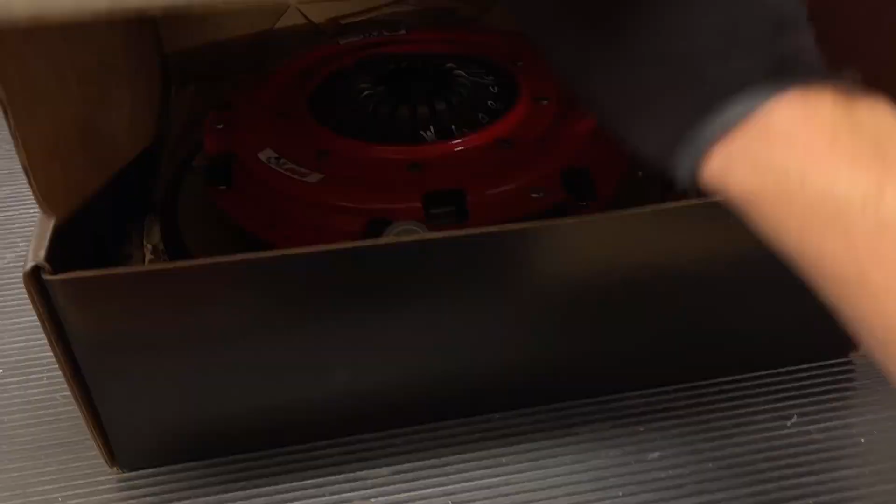Hey guys, Danny Johnson here, and today we're installing this McLeod RXT twin disc clutch into our 2004 SVT Cobra. Now this is a 26 spline clutch, and so we already installed the 26 spline input shaft, so check the video description for that video. And on this one we're going to have to also be changing our pivot ball stud length to make sure that it fits properly, since this clutch does come out a little bit deeper than a stock clutch, being a twin disc clutch.

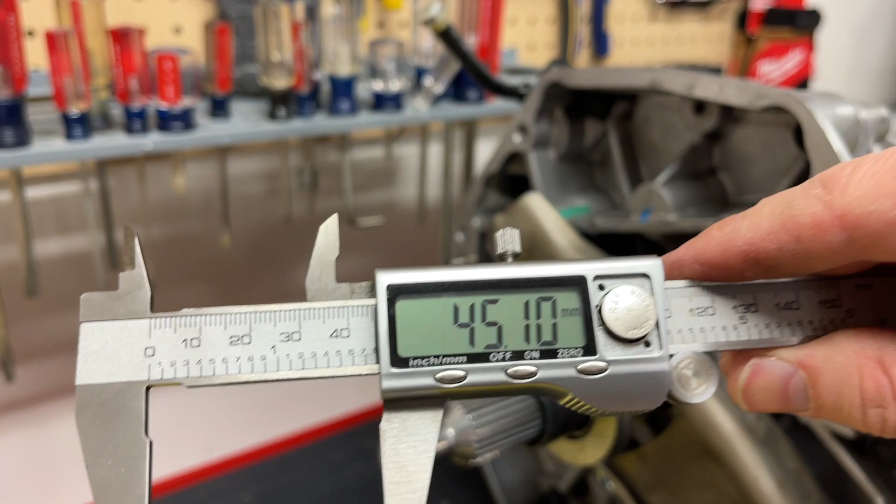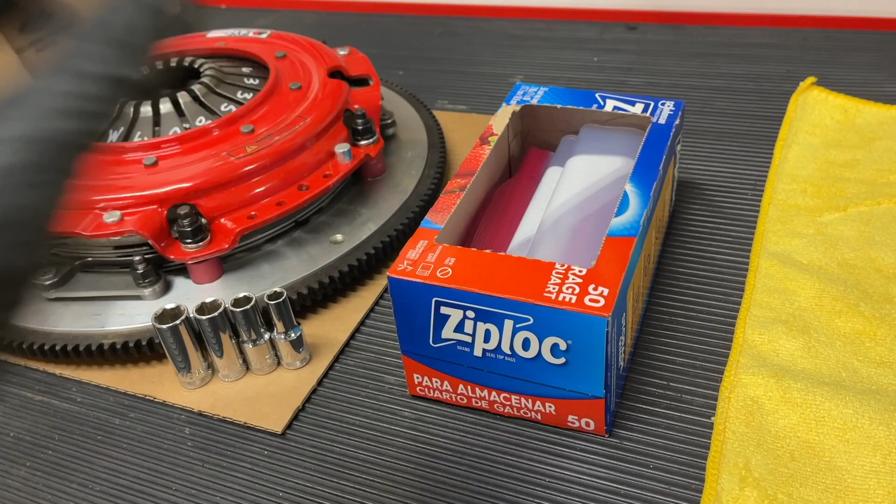I decided to get a bunch of Ziploc bags and label everything. It's probably not too important on the pressure plate nuts because it's just the nut, the lock washer, and the regular washer, but it is important with shims on the other pieces. So my recommendation is to put all of the hardware in individual labeled bags. So I'm going to take this mark here and say bolt 1, 2, 3, 4, 5, and 6. And so basically that's how I'm going to count this. You could do it however you want.

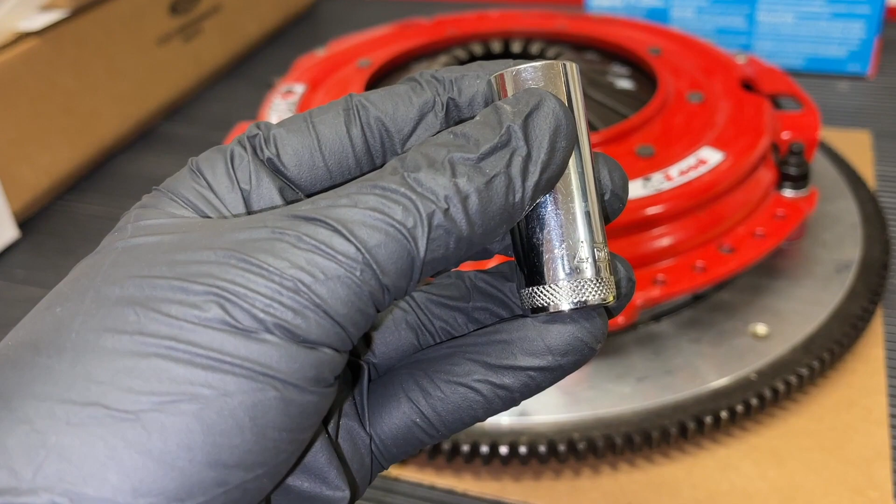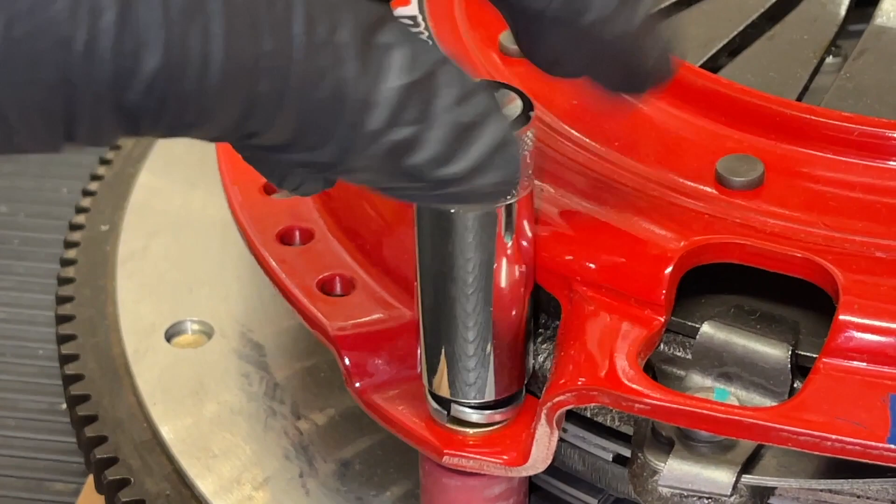So I'm going to rotate the flywheel, and I'm going to use the alignment mark as basically the center line. I'm going to go clockwise and go ahead and take out these. Now I'm also going to take them off in opposite directions, the crisscross star pattern. I'll be using a 14 millimeter socket for this. It really shouldn't matter the order you take them off, but torquing them down, you want to go in the star pattern across from itself. So we're going to go ahead and just use that same method here. This one was even on light enough that it basically came off hand tight, because again, it's not assembled to go on the car yet.

So we're going to go ahead and remove this nut here, and right under it you'll notice there is a lock washer. So the lock washer has a little split in it. Okay, so that's the one that goes on next. And then under that we have this gold color washer as well. So that's going to be the orientation for all these. Again, I kind of went crisscross and removed them in a star pattern, even though that really shouldn't matter for removing it, but that's just what I wanted to do.

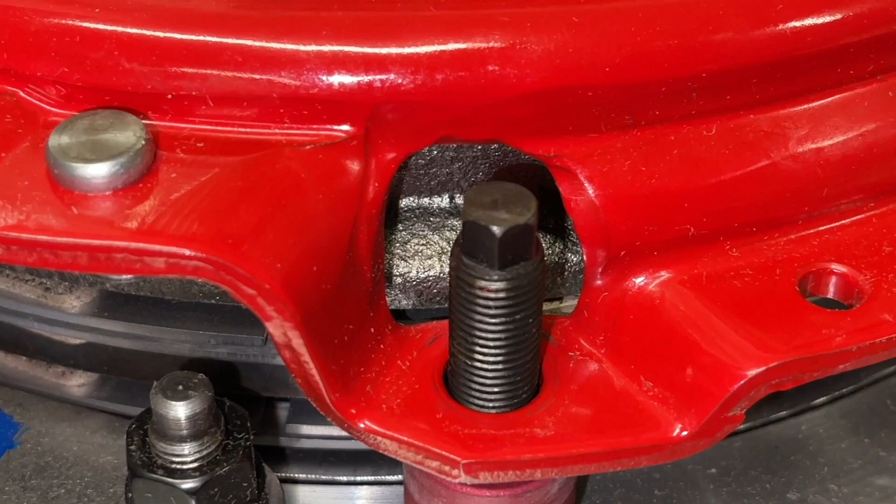Okay, so again, here's what you have for the pressure plate, at least the top part of the pressure plate, and these are studs that are coming out from the flywheel, and they have the little hex on the top, so you can take those out if you wanted to. But with all of these 6 removed, we're going to go ahead and lift the pressure plate off of the rest of the arrangement here. We're going to flip this upside down and gently put it down over here. You don't want to touch any of that surface area. You want to keep it clean of grease and everything.

Okay, so now you'll notice the first disc that we come up to says top, and so this is the top disc, and it also happens to be the top side. And so just so you know that that's right too, again, don't touch any of the surface area or get it dirty. You'll see flywheel side is what it says on the back here. So this is the top disc, that's the flywheel side, and so this is the pressure plate side. So again, this is how it would go on. So we're just basically going to unstack this and show you.

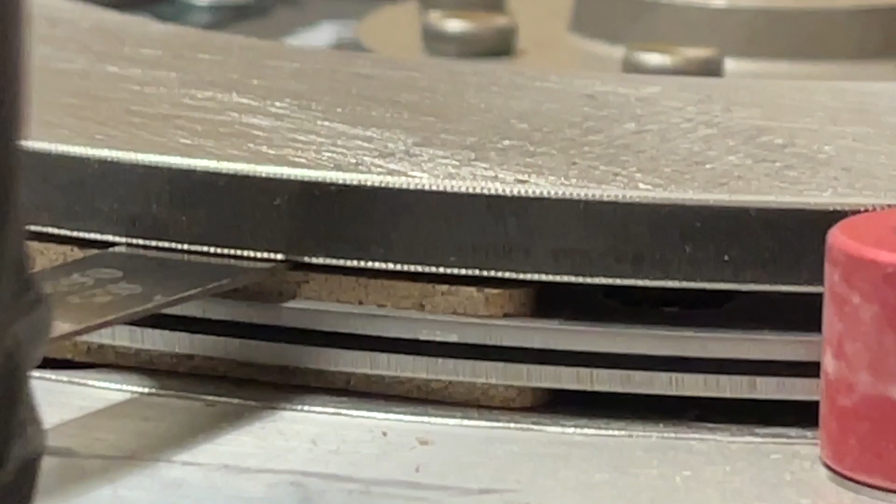Next we have our floater plate that acts like another pressure plate, and it has its nuts with lock washers on that. Now with them tightened down, they were down pretty tight. We're checking this when it's on the car, but I'm going to show you what we're doing: we're taking basically our 20 thousandths here and making sure that it can fit in between that disc.

If you have more than 25 thousandths, then you're going to have to rearrange it somehow, okay, with different shims and washers. And notice we have our paint mark here, and notice how that strap is on the bottom of our floating disc here. You don't want to put it on upside down when you reassemble it. Okay, again, we're putting all this in bags.

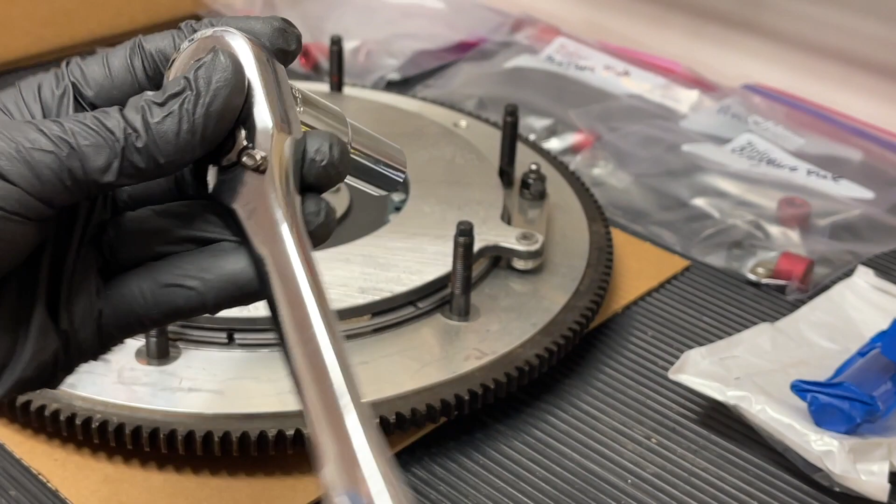These will now float right off, and so we're going to go ahead and take these. And even though these ones really shouldn't matter, we're just keeping them exactly how they came to us. So 1, 2, 3, 4, 5, and 6. And this one required the 1/2 inch socket, and I also used a larger 1/2 inch drive because they had this one torqued down pretty tight. Okay, so we're going to go ahead and break these ones loose, and we're going to keep all of this hardware in its own bags too.

So we have the pressure plate bolts, which were 1 through 6, and now we have what we're going to call our floater ring ones, and there's 3 of those. So I named this one floater number 1, and so as you'll see here, this is going to be the nut on the top and a crush washer right below it. We're going to take those off, floater 1, 2, and 3.

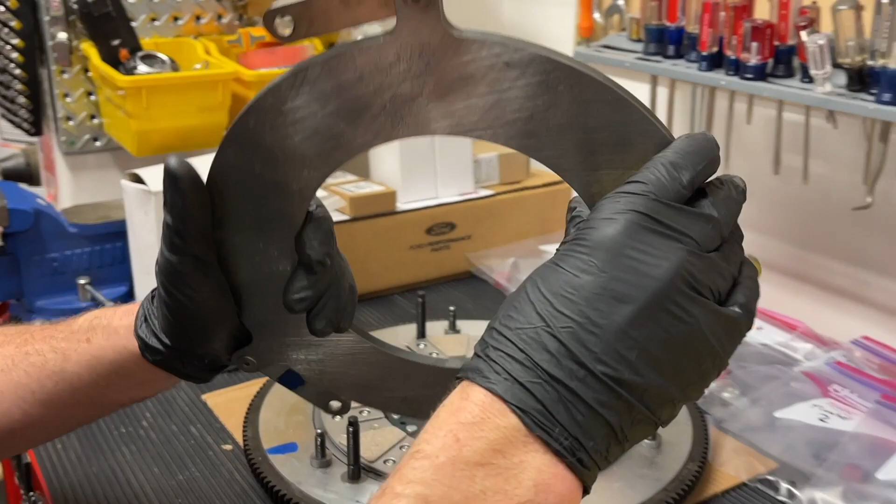And now as we lift this off on our floater ring, okay, notice this is how you could get this upside down. You want these tabs right here to be the one that touched the flywheel. So you can see if I inverted it, you could put it on backwards, and you should not, but I'm just saying it's possible to put it on backwards. So you want to keep that orientation correct. So that's what they mean by those straps being the flywheel side.

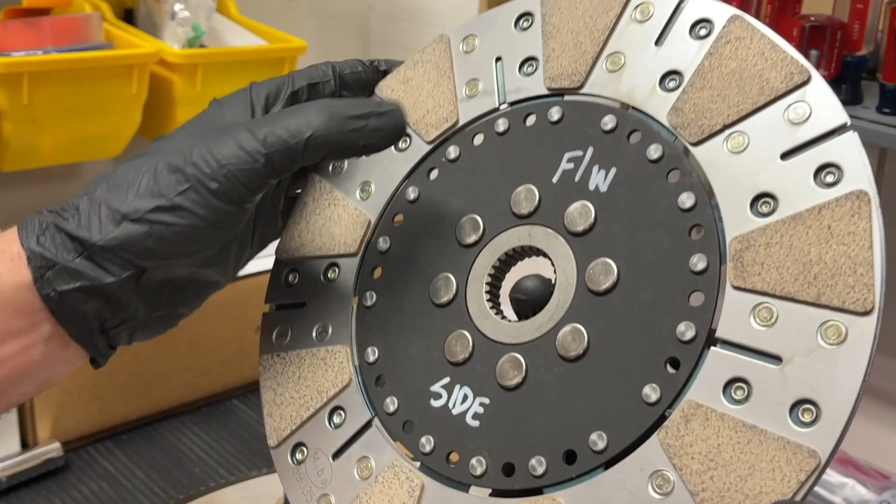Okay, next we're going to come in and take off our second disc. Okay, so this one is going to say it's the bottom. Okay, so this is the bottom disc. However, don't think that's the bottom of the disc. This is the flywheel side here. Okay, so it's the second disc or the bottom disc, but you want the flywheel side facing the flywheel.

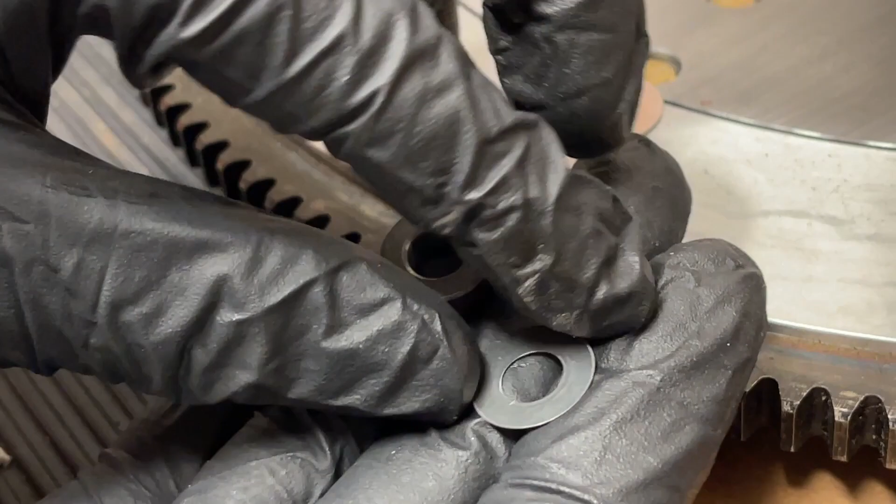Now notice that where the floater straps were, where we take that off, there are now shims, as well as another one of the stands, as it's called, or the bigger spacer. Okay, and there were actually 2 of these little tiny shims, as you see. They came apart here. So you had 2 shims and a spacer. And they might have it set up differently however they needed to from the factory. But just wanted to show you what that looks like.

And we're keeping that in our floater bag again, just keeping everything separate. So this is going to be floater number 1 is how we clocked this one. And so we're going to go ahead and put this in the bag. Okay, floater number 2 is the same thing. We had the spacer with the 2 shims on top. And I've seen other people who had these, they gave them extra shims. I didn't see any extra shims with mine, but this is how it came out.

You'll also notice that under the pressure plate studs, there are also tiny shims here on the bottom. There were 2 of them, so you've got to really watch out for this hardware and make sure it does not fall off as you're disassembling this and then putting it back together when it gets to the car.

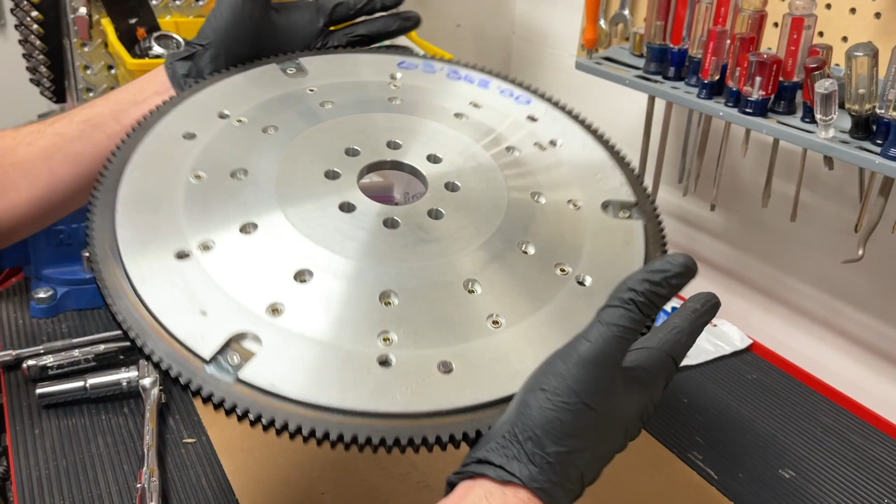So now you'll notice I have 8 holes for the 8-bolt crankshaft on the Cobra. So that's really important. If you have a Mustang GT 2-valve, unless it had the Windsor engine from 99 and 2000 and half-year model in 01, you might have an 8-bolt crank for that one, but most of the GTs with the Romeo engines, the 2-valves, had 6-bolt cranks.

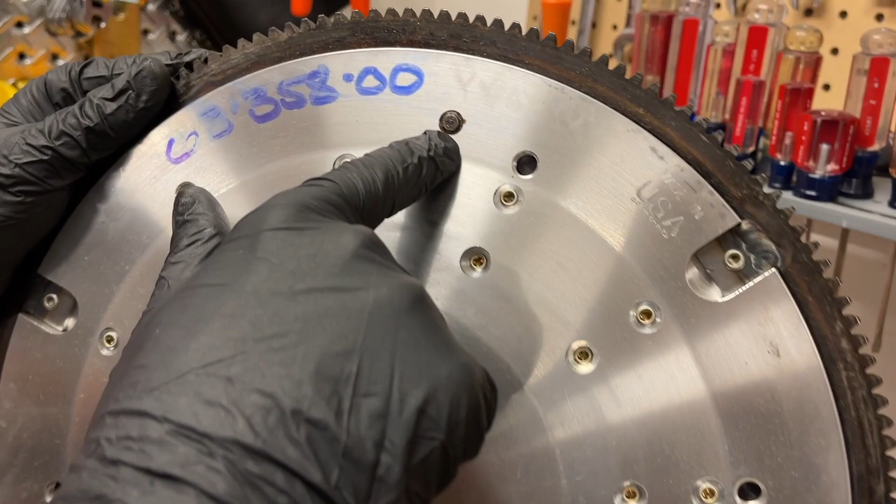Okay, now this flywheel was made in the USA, and it looks very similar to the stock Cobra one. You can see here where these studs are coming through the back. And something I wanted to point out, because we're going to compare this side by side with a Terminator flywheel, are these studs and how they compare. And so the main thing I want to point out is that the Terminator flywheel, for example, has marks where it has been balanced. They are slightly different. Laying these down next to each other, they're different too.

And if you are keeping your stock flywheel, I believe that the McLeod kit would then give you an adapter plate that goes onto your flywheel. You're no longer using your flywheel surface because it sits different. So just keep that in mind and look into the kits. I bought mine that came with everything that was new so that I didn't have to worry about any kind of fitment or problems.

Also, something along the lines with the balancing, I believe that they want you to balance it if you're putting their new kit and retrofitting it onto your flywheel with the adapter plate. When McLeod sends you the entire kit, it might be a little bit better balanced. I didn't seem to have any problems with vibrations or anything with the car so far.

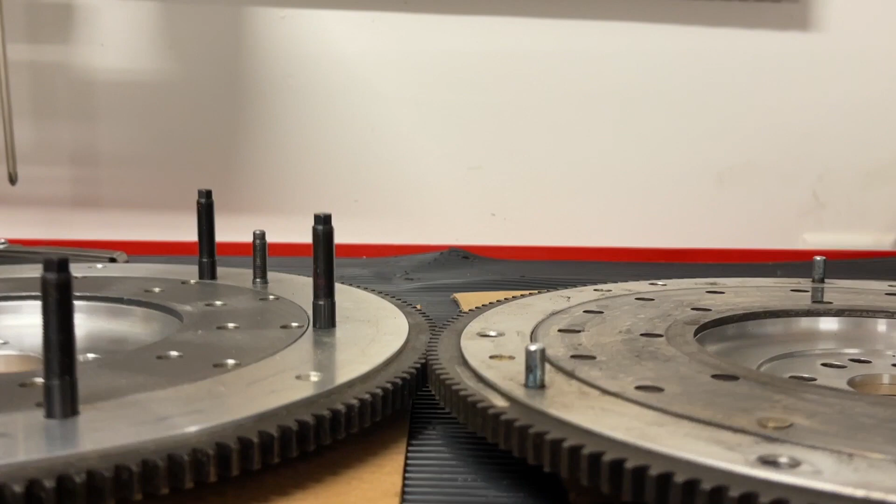Now, there's also a lot of questions about the pivot ball stud length and why it's so different for everybody. As you can see, just with these 2 flywheels themselves, they sit differently. So that could be some of the factors that are involved. So as you'll see in the video, we really need to measure what we're installing and have measurements ahead of time before we install.

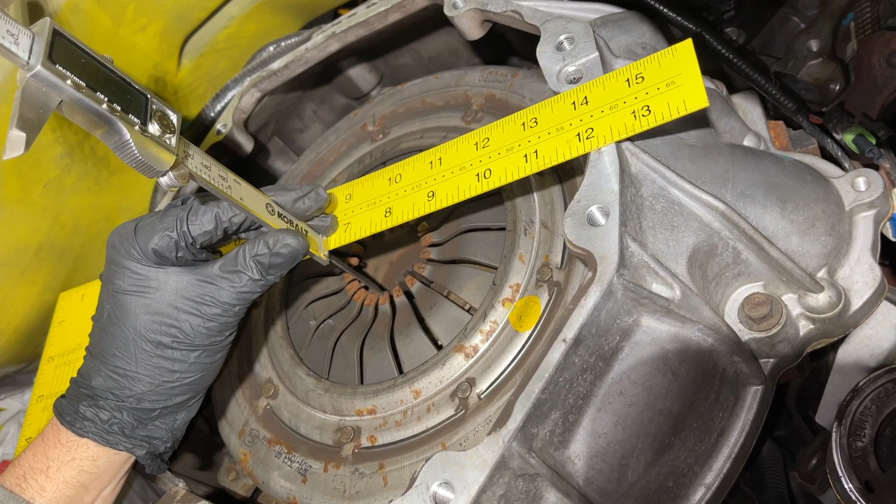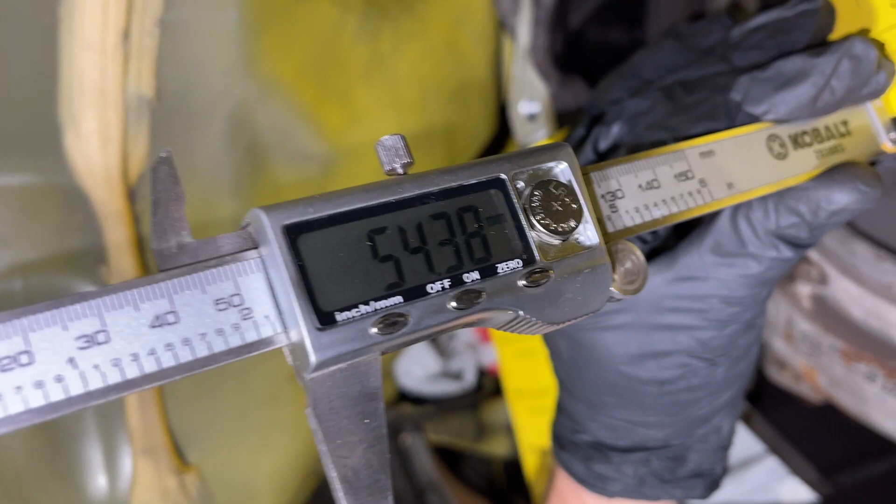Now, before we remove the bell housing and the stock clutch, we want to get some stock measurements here. So what we're doing is measuring across from the bell housing down to the diaphragm fingers. If we take a measurement this way, it's 54.38 millimeters, and that is from the back side of the ruler. There is another way to do it where you're stretching the caliper out. It's a little harder to get it on there straight because the feet have to be in there a little way. So you notice the measurement's off slightly.

So however you want to do it, if you want to take the measurement and then subtract the width of the ruler you're using, or do it this way where you're bringing it out, we just want to get some basic measurements. And what we came up with was that basically when the RXT is installed, it's about 6 or 7 millimeters deeper. So it's going to come towards the back of the car more. And that's going to make us do some different things with the pivot ball length for the stud.

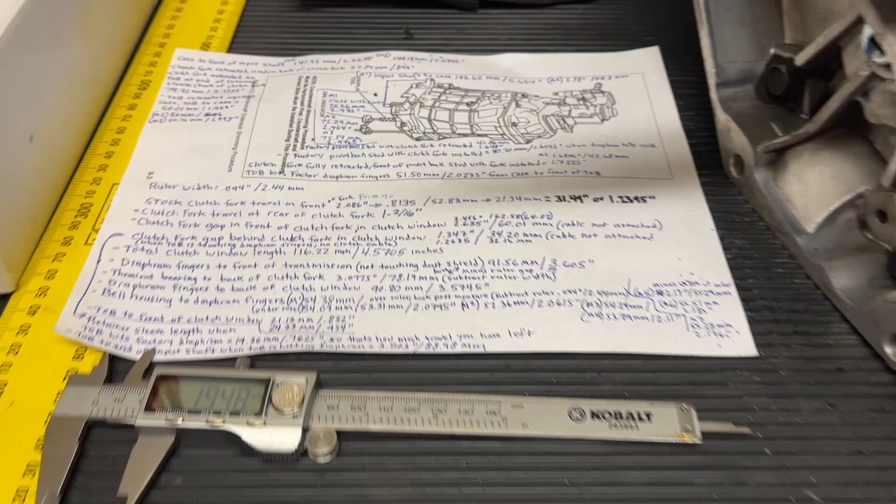But anyway, we went through and got some measurements here, and check the video description. I'm going to put a very in-depth video on all the measurements that I took during this process, which was a huge amount of them. But anyway, we want to have these measurements at hand.

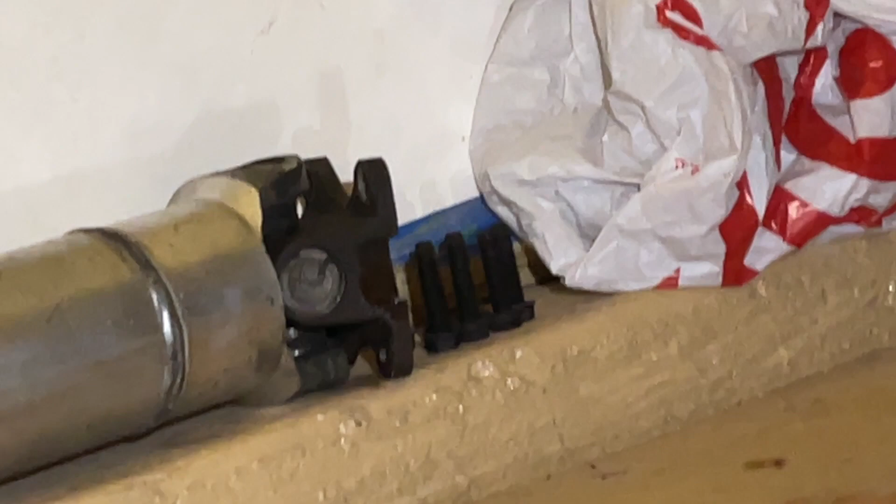T56 bell housing bolts, they're all the same size except for the first two down from the top. So these two are the very top ones. The next two down on each side are the longer ones. And the case bolts on the T56 are also all the same size, if you're taking it off, not at the bell housing.

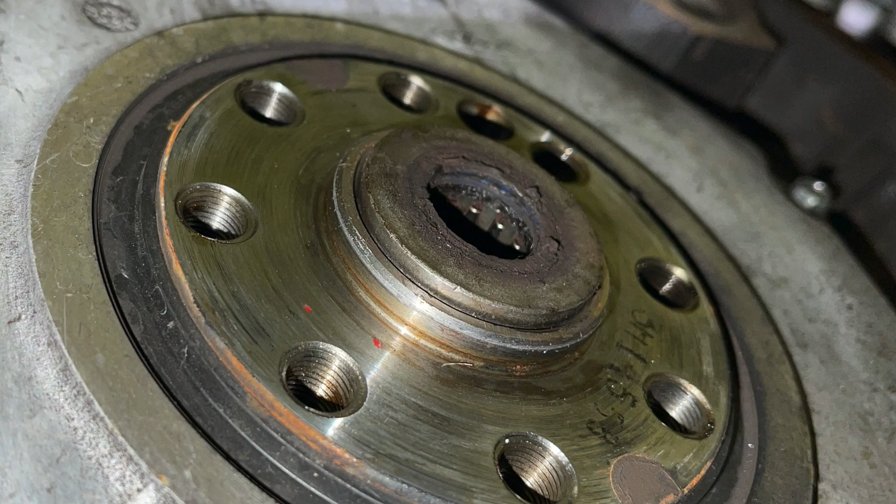Okay, so we removed the bell housing bolts, the pressure plate, and the flywheel off the car. This is what the stock pilot bearing looks like. Everybody has a question if they've driven theirs in far enough, and you can see it sticks out a little bit when it's fully installed. So now we're using our puller, and I have a full video showing how to use this puller and where you can purchase it if you want.

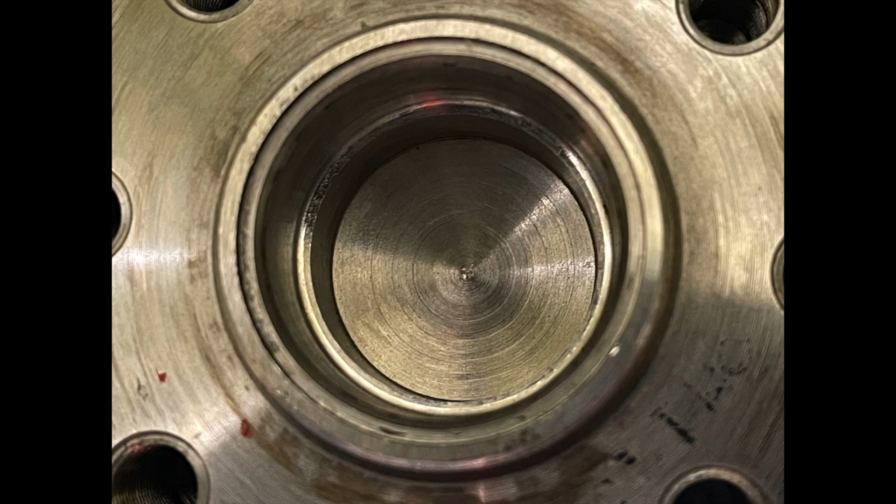We're going to pop the pilot bearing out of the crankshaft, and then we're just going to clean this up the best that we can. Our rear main seal looks really good, so we don't have to worry about that. Just get down in here with some brake parts cleaner. We put our pilot bearing in the freezer and then just tapped it in. Check the video description if you want the details of how to do a clutch, but this is more focusing on the RXT, and you can see my other videos if you want.

So we're going to start with our RXT here. The first thing we want to do is clean any of the oil off of it. It will have oil from being stored and shipped. So we're taking some brake parts cleaner, and we're just going on the mating surface where the clutch is actually going to contact.

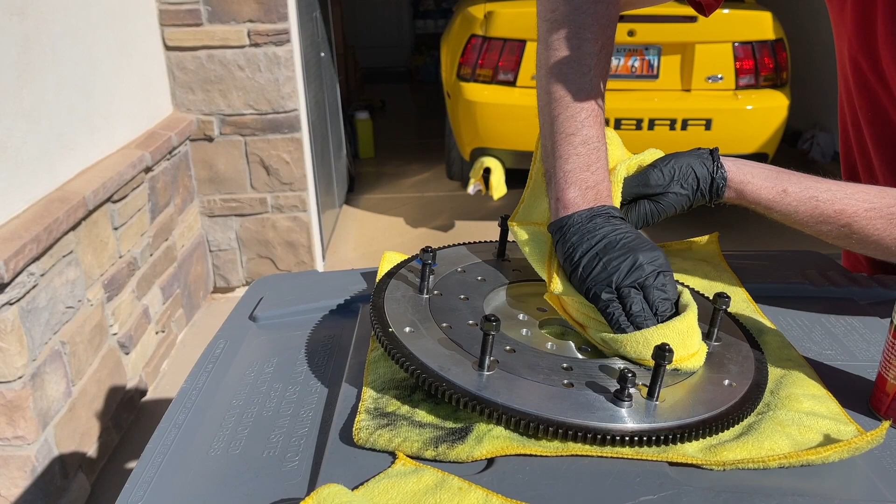Okay, as you'll see here, it's pretty black on the rag where this was, because they coat it with oil so you don't get rust as it's being stored. I've even heard to use the green brake parts cleaner. Okay, we got our new flywheel bolts and some thread locker.

So we're going to go ahead and put the new flywheel up on here. Aluminum's really nice. I've dropped a steel one on my face before. But anyway, when you line this one up, you want to clock it till all the holes are lining up. It might look deceiving, but you actually have to rotate it several times until all of them line up, because they're not equally spaced. So once you get it to where everything's clocked the right way, run the flywheel bolts in, at least to stabilize it.

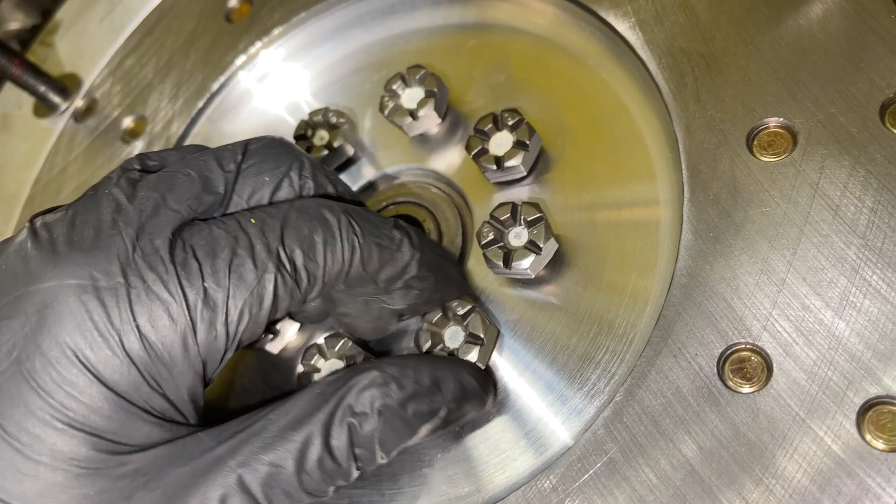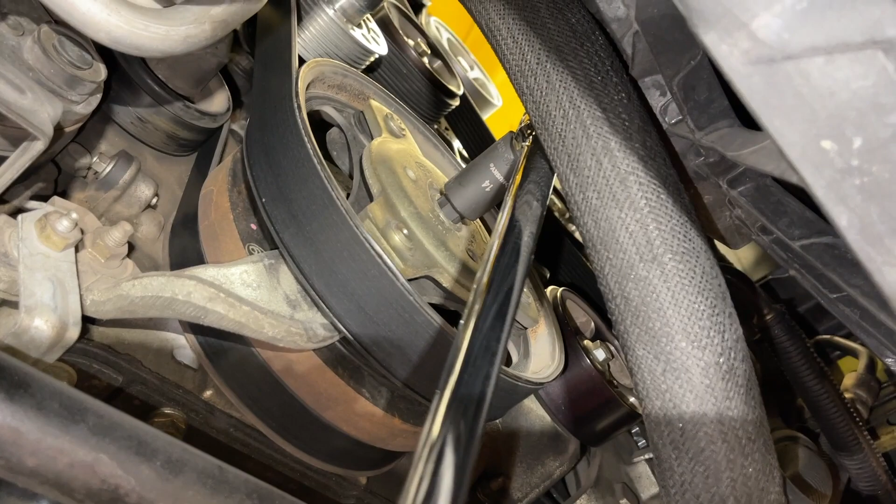And they're still loose right now, and so what I'm doing is cleaning off any oil that's on our new hardware as well, and putting a thin stripe of the blue Loctite. So now I'm putting them back in, and we're going to torque these down to 65 foot-pounds. So we're going to hold the crankshaft still. On the Terminator, it's a 14 millimeter Allen that you actually have to put in the front of the crank, and so that's how we can hold the crankshaft still.

If you have a regular GT or another Mustang, there'll be a bolt on the crankshaft there. So as you see, I'm holding the crankshaft while torquing this down. So we're doing our star pattern, every bolt across from itself, and 65 foot-pounds is the rating. So you can also put a dab of grease on the back side of the bolt head so that it doesn't scar up the aluminum as it bolts down.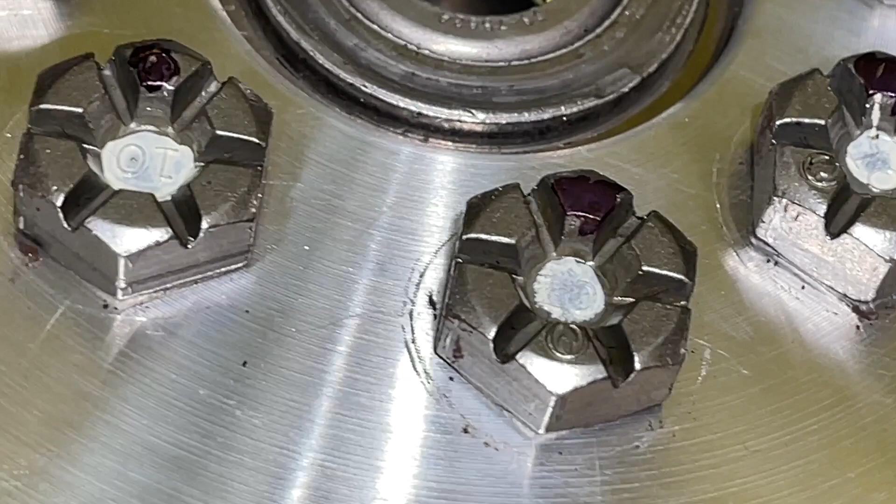And I went through and I marked every one of these to make sure that it had been torqued. And again, we're going across from each bolt as you're torquing it down, the star pattern. So everything's looking good here. Now we're going to come back in and again just make sure that this mating surface is clean.

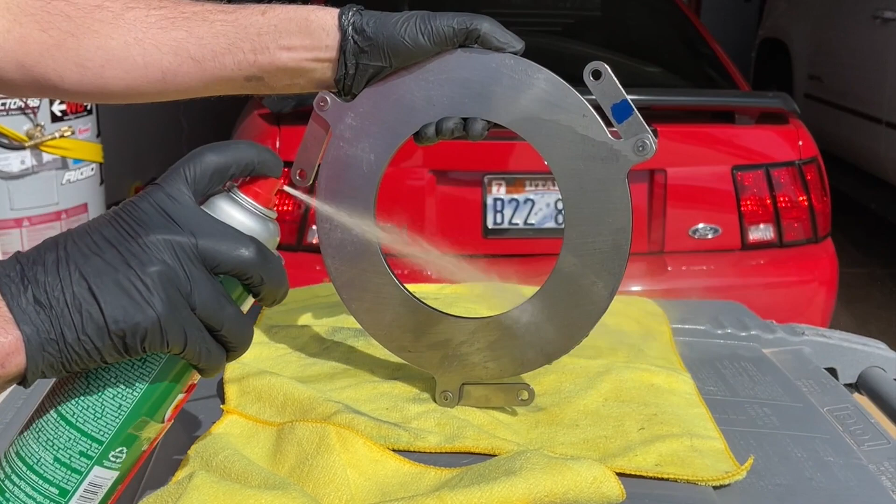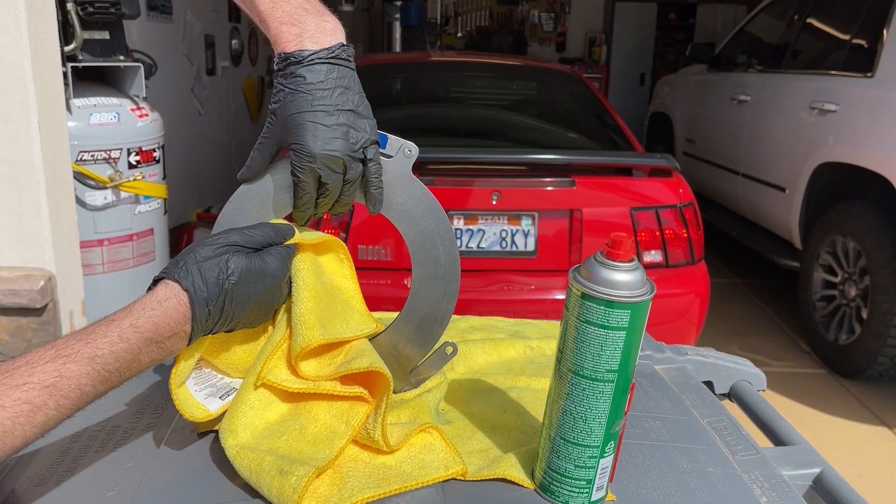Coming back outside, we're going to clean now the floater ring plate, okay? And so be careful, you have that indication mark, the paint mark for alignment. You don't want that to come off, so that you know how to align everything. But we're going to go ahead and just wipe this one down as well and get it nice and clean.

We had Justin SVT run and get a better torque wrench as well for smaller increments. Mine was for higher ones, so he ran home for a minute, which gave me a time to just enjoy the beautiful morning.

So as a recap for our floater ring, remember that you have the stand, which comes first, which is the thick piece. Okay, that's called the stand, and then these are the shims, and there's 2 of them on each of the floater rings. So the stand is going to go on first, followed by the 2 shims. Then we're going to put our floater ring on. So earlier in the video, we had all of our hardware separated, and so now we're putting it back on.

And so the first thing we're going to do is take the hardware off for our floater ring. And so we have the nut, then we have the crush washer, and then we have the shims. Make sure that they're on, and there's a stand, as it's called, that's under those. So refer to the front of the video if you haven't seen that.

So the first clutch disc is going to say flywheel side, and then it's going to say bottom. Okay, so flywheel side hits the flywheel, and bottom means it's the bottom disc. So don't think that that's the bottom part of this one. We're going to run our alignment tool in here just to hold it in place slightly.

And so now we're going to go ahead and bring up our floater ring plate. So make sure that none of those shims have fallen off the stands. And so another set of hands really helps here. Justin SVT, as always, is here helping me out, which I really appreciate.

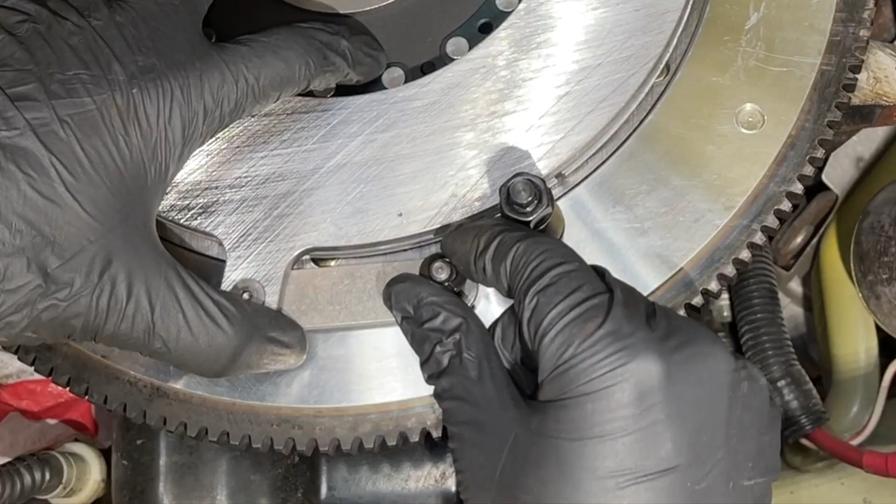So do not put this piece on upside down. It's possible to do so. So if the alignment mark's there, you shouldn't mess that one up, but make sure that it's going on as shown here, where you have the floater plate, and then where the floater plate strap is, it's down onto the flywheel side. Okay, so again, we had the stand, we had the shims, and now we're putting on the floater plate itself, followed by the crush washer, and now the nut.

Okay, so we have all 3 of these on, and they're nice and snug. And so what we're going to do is torque this down to 25 foot-pounds. Okay, so it's not a lot, 25 foot-pounds. We did 1, 2, and 3, and we want to check now to make sure that this first disc can move. And so it's moving freely now. In fact, it's moving a little too freely.

So basically, we're bringing in our feeler gauge. We're supposed to have 20 thousandths, maybe 25 thousandths at the most. But as you can see, we were getting 30 thousandths. So that's way too loose, and it can actually cause the top disc to perform differently. So we had to take it off and start over again.

So we removed the floater plate. It's not fun to do this, but you want to do it right. So we're going to go ahead and take this back off and take it over to the workbench. And so the way that we're going to adjust this is changing the shims that are underneath the floater plate. So here there's 2 of them on each of these. So we're going to go ahead and take these with us and go measure them over at the table. You don't want any of these to fall and get lost either.

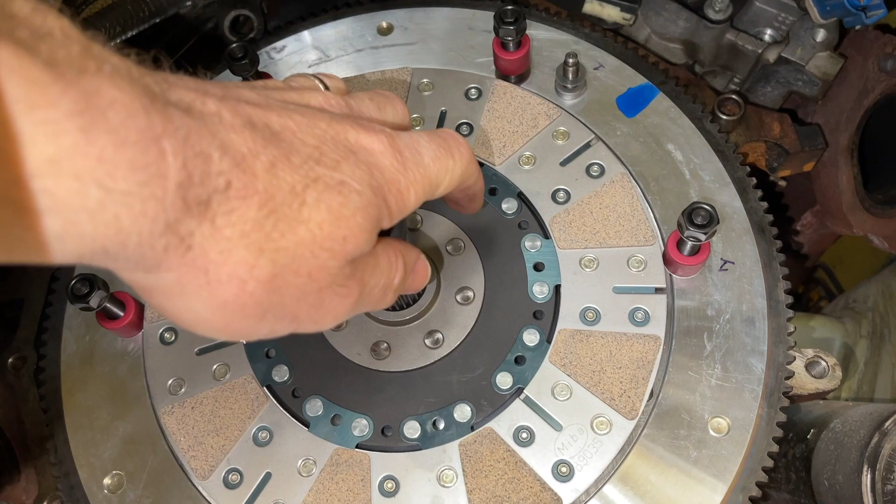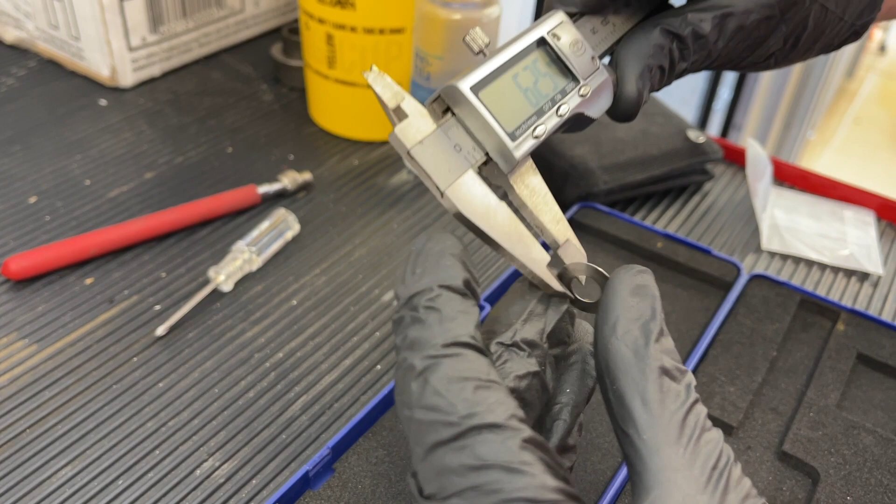So as we took this over to the workbench, what we were getting was basically 0.25 millimeter on these. Now sometimes I was getting a little bit higher of a reading, and it might just be because it's just such a fractional size on these. But in the end, we put back in one that was 0.25 millimeters on each of the stands, and then we took our next measurement. So we separated these out. I drew numbers on them so I know where they came from, if that was important. But basically we put a 0.25 millimeter shim back on each stand.

Okay, so again, for the floater plate, 25 foot-pounds is what they want to see on this one. So each stand now had one of the 0.25 millimeter shims on it, and we took our measurement and we got our 20 thousandths clearance. So that's with each of these 3 floater ring plates torqued down to 25 foot-pounds. Okay, we checked and the disc still spun freely like it should.

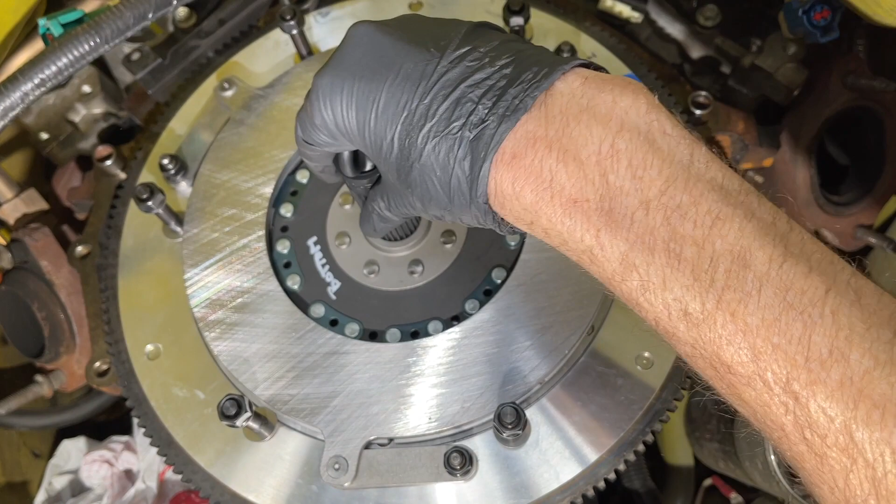And so now we're assembling for the pressure plate. So you have the shim on the bottom, then the stand that came down. Okay, so again, that's a shim down there. Make sure that it's in that order. Shim, then the stand. And we're just putting these all back in. We had them individually marked in bags, as you saw earlier in the video.

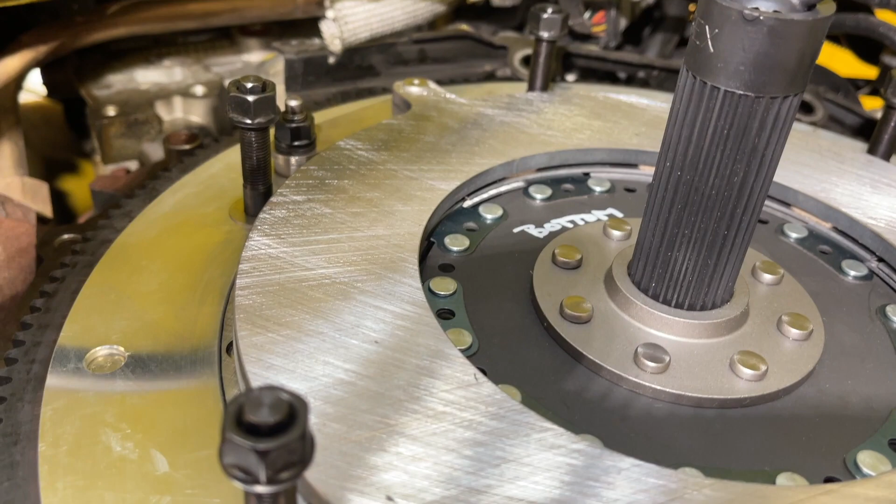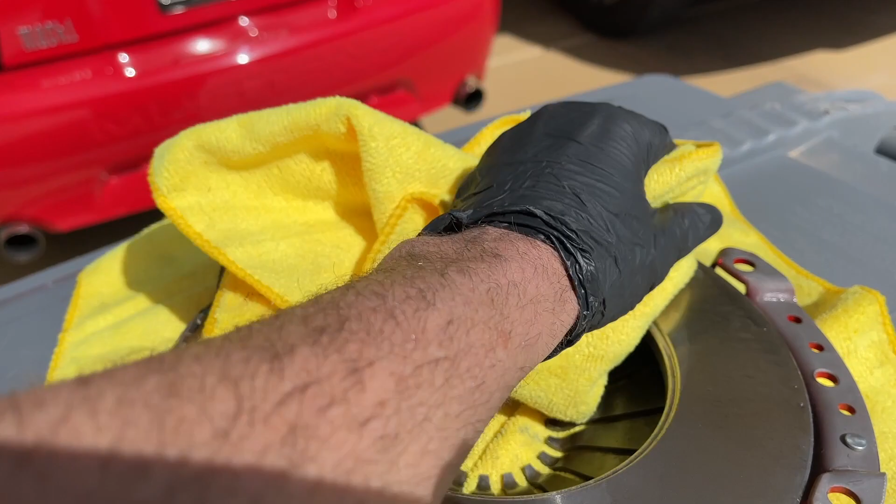Now we're going to clean the pressure plate itself. So same thing, coming through with some brake cleaner and really cleaning this up. With a microfiber, it kind of grabs on this material, so maybe a different rag would have been better. But we did get the grease off it, so it looked pretty good. So just make sure that the mating surface is perfectly clean from any oils or even your fingerprints, grease, anything like that. We want it nice and clean.

Okay, so next comes in flywheel side, and this is the top disc. Okay, now what's really important with these is with these 2 discs, they need to line up together or your input shaft is not going to go through. So here's our 26 spline input shaft tool, and this is good to use at this stage where you're sliding a pressure plate over it and everything. But in the end, you'll see us use the input shaft itself as it becomes a much better tool being metal. So anyway, we slid this up here.

This one again is also clocked, and it has the alignment mark. So you see at the top right where the blue is, it's also lining up with the other blue marks to make sure that we have this clocked properly. So there's our alignment marks. Make sure that that's right.

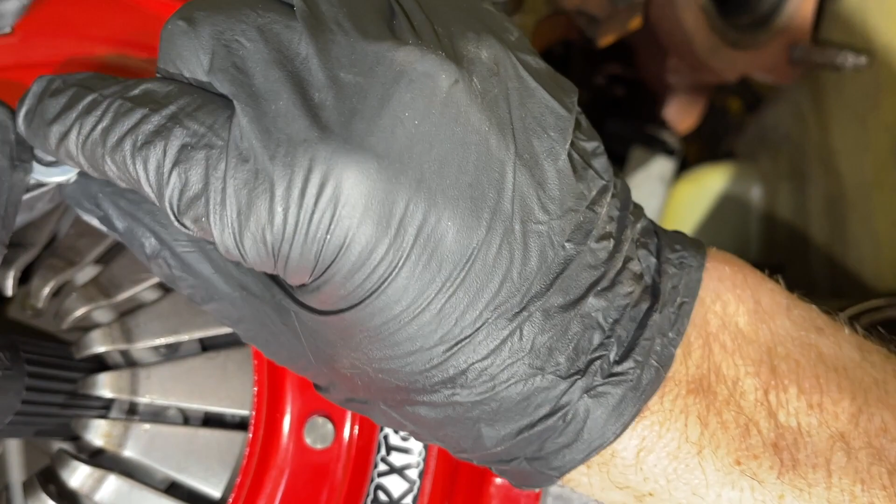And you have a little bit of wobble here, so you want to hold this as straight as you can, and you want to spin it. And by spinning it, you're clocking both of them together so that it will line up a lot better when the input shaft goes in. Okay, so now we have our washer, followed by our crush washer, followed by our nut.

Now we had these individually marked in bags, and again, this hardware might not be specific, but we just kept everything separated. So here's the input shaft itself, since we're installing that in the transmission next, and that made the best alignment tool because it's metal. You can clock it and turn it and really get it in there.

And now as we're tightening these ones down in our star pattern, that's where you want to make sure everything is straight. Okay, so this one is now 35 foot-pounds, and we are not using Loctite on any of these pressure plate or floater ring hardware. Okay, McLeod says do not use Loctite. So we used Loctite on the flywheel bolts, but that was the last time.

So you want to make sure that this is even and that it sat there right. Justin SVT was holding that input shaft up in there as straight as he could as well, which helped. And I'll tell you, we put the transmission in later and it went right in.

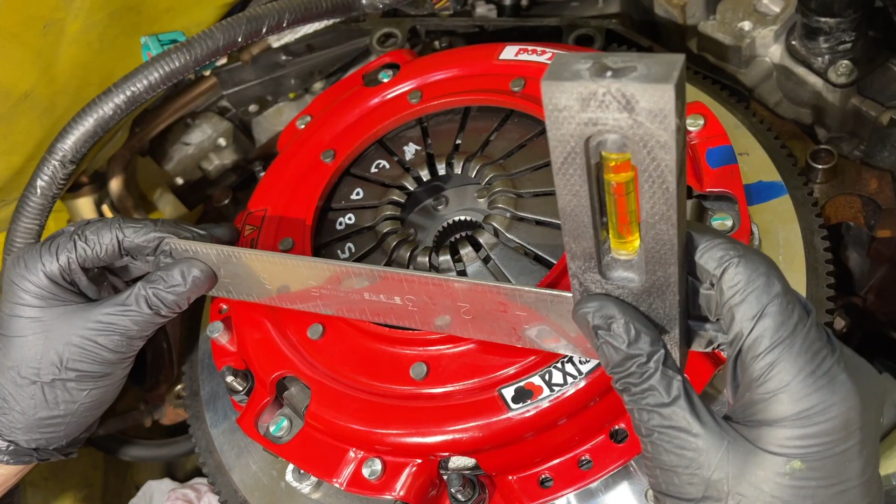Next, we're taking a flat, just a little straight edge here and making sure that these have gone down on the diaphragm fingers enough. They should have collapsed down, and as you look in here, you can see how well both of those clutch discs are clocked together. They're perfectly lined up, and that made a huge difference when we went to put the transmission in.

It went right in. So with the new clutch installed, now we're going to want to take our same measurements from the diaphragm fingers to the bell housing. And remember, if you're measuring on one side of the ruler, we need to subtract this amount or try to get a better measurement. So this one works pretty good, 48.25 millimeters if we're going from the diaphragm fingers up until we get to the back of the ruler. It's a little bit more wobbly that way, kind of harder to get a reading.

So 53.35 or so was the factory one. So what we're going to do is look at those two numbers, and in this case, this is going to be a difference of about 5.1 millimeters. The new clutch comes out farther than the old one. So we're going to work with some adjustability on this using the pivot ball stud.

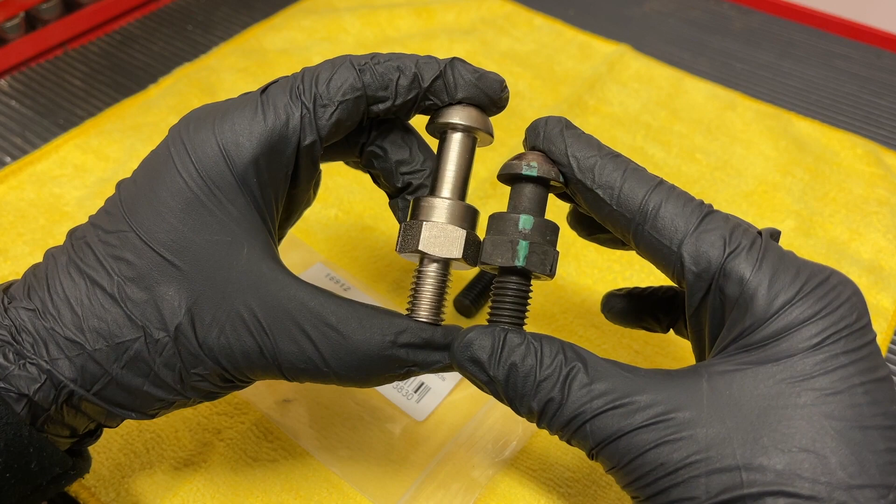And so here's the factory one. And as you can see, it wears out at the top. You can get some clutch vibration from that, so it needed to be replaced anyway. But if you look at the stock modular pivot ball, it's huge, so it won't work. The one that we have factory is from the T56, and the one we're using today is McLeod 16912.

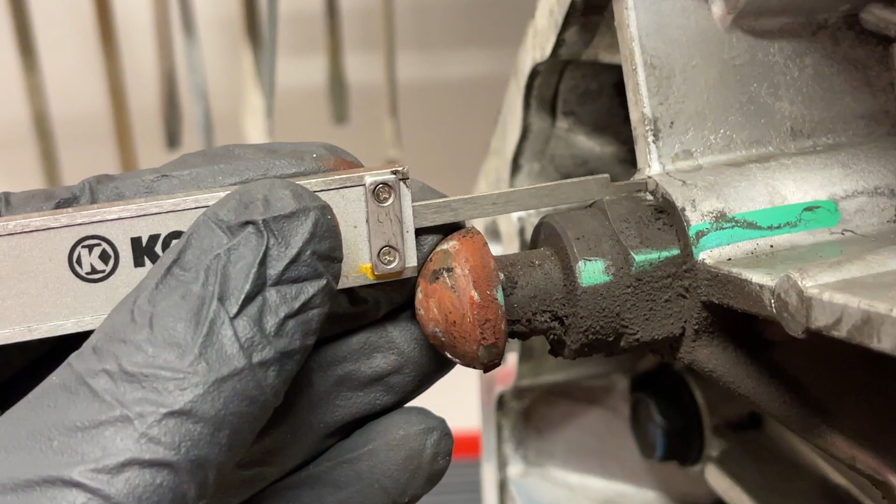And so if you look, it's the exact same length overall for the stud, but the adjustable jam nut is how we're going to be able to change how far in this pivot ball stud can go compared to the other one. Now, measuring the pivot ball stud from the factory, we're getting a pretty good reading here of about 37.11 millimeters.

And so now that we have that measurement, we can take our 7/8 inch socket and we're going to put it all the way over the pivot ball stud. You could use an open end wrench too. It's very easy on the T56 with the flat case without the bell housing. Some transmissions it's harder to get a wrench angled in there.

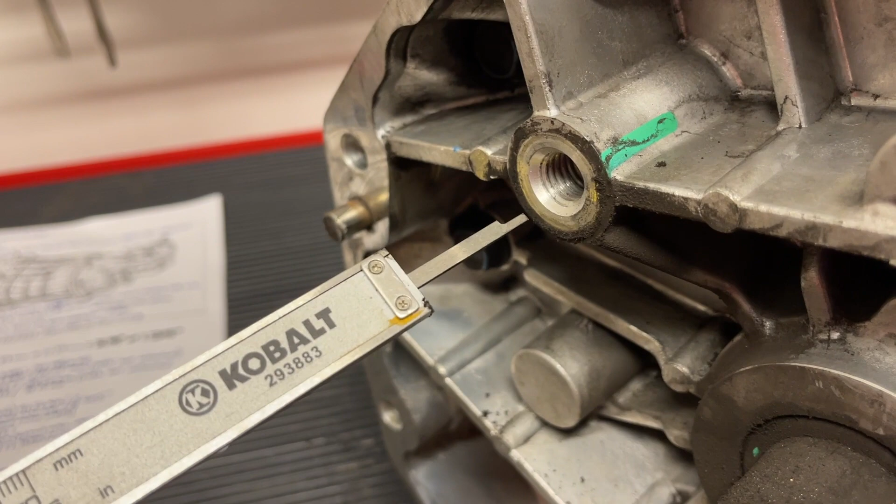So we're going to go ahead and remove this after we have that measurement, and we're going to check the depth of the threads. The T56 Magnum apparently doesn't go in as far, so you might have to cut your pivot ball stud down if you need it to get any shorter. So as with the stock T56, we're looking at about 30 millimeters is how far the threads will go in normally. So that's deeper than what the factory pivot ball has as far as the threads, as you can see.

And so we're just going to set these down and kind of take some comparisons. And check the video description because I'm going to make a video with every measurement that I took, which was a lot of measurements. But what we're going to do now is take our new adjustable pivot ball stud and we're going to thread this one in.

Now, when it's all said and done, we will use Loctite and bolt down that jam nut. So this is just for test fitting. So we'll just put this in all the way and then tighten down that jam nut, and eventually we'll do that with a wrench.

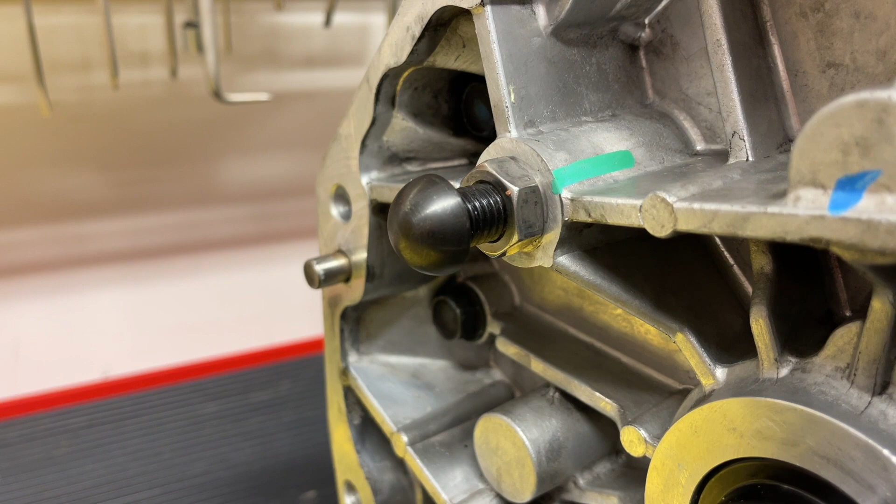With that said, now it's in as far as it can, and we're going to put the old bolt up there or take measurements using our caliper again. But as you can see, the adjustable pivot ball comes in just a little bit more than the factory one when it's all the way threaded in.

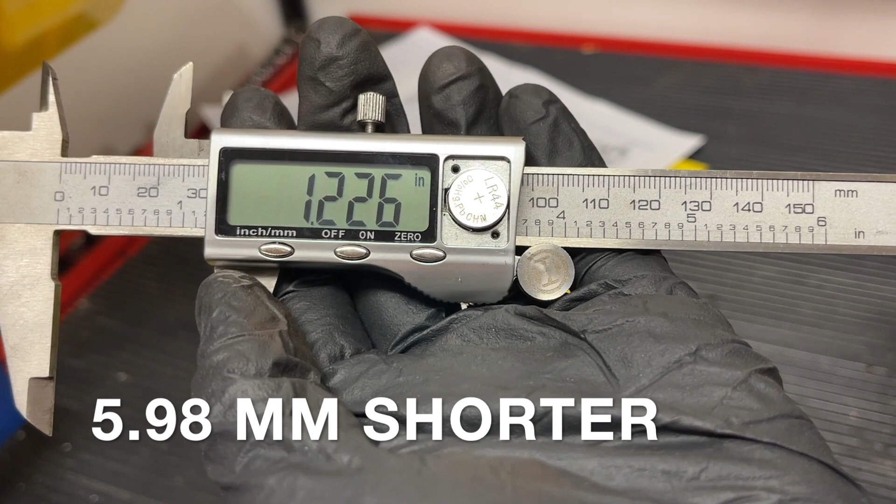So when we compare these two measurements, the factory pivot ball stud came in at 37.11 millimeters, and the new one, when it's installed all the way in, came in at almost 6 millimeters shorter than the other one. So the reading we got was 31.13. So that's going to help us because that's going to be helping bring the throwout bearing assembly away from the deeper clutch that we have now installed. So here's the factory ones just to look at. It's almost comical. There's no way that other one would work.

So we're going to be using a brand new clutch fork as well here, and a new release bearing or throwout bearing. And so we'll install these, and we're going to be using some of this fully synthetic grease, and this has a dropping point of 500 degrees Fahrenheit. So this is a Ford spec compatible grease.

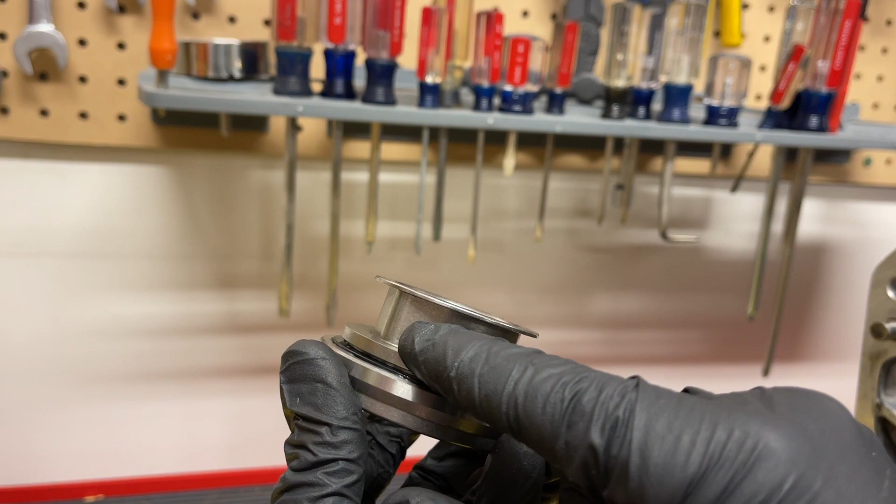And so here's our throwout bearing, and if you look at the front of it, the throwout bearing has this little teardrop shape to it, and so it comes to this point, and that point will be pointing downward on the clutch fork, and I'll show you where that is exactly here. But we're going to take some grease and just put it on the inside here. The bearing itself is pre and internally lubricated, so we don't have to worry about that.

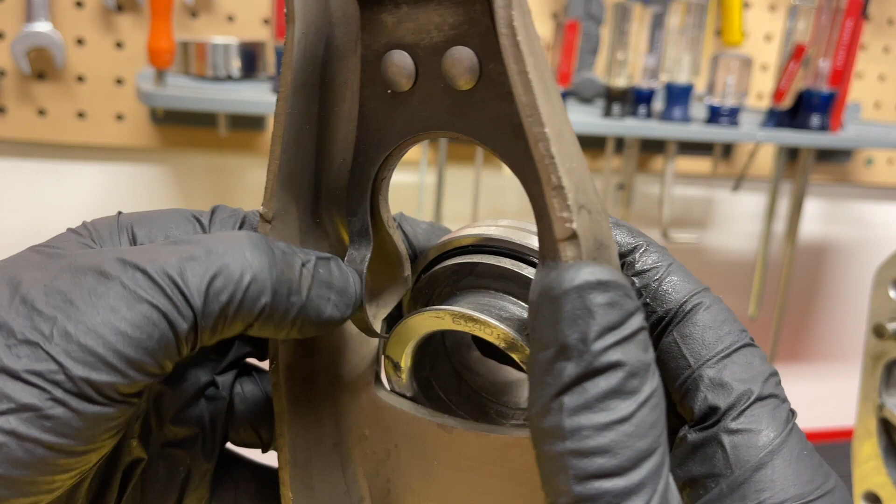So on the clutch fork you have this flat area at the bottom of the clutch fork as it's headed down. So we're going to go ahead and have that point or teardrop pointing towards that. So to put the release bearing in, we're going to push down on each of these tabs with our thumbs to make sure that it goes into these grooves. And so of course make sure that the bearing is pointed away from you as you're doing this, and then you just slide the bearing up.

And so as it clicks into place here, we're going to make sure that the orientation of this teardrop is pointed downward. So there it is. If you can see, it comes to the point right here. That's what's pointing down on the fork. Now the prongs on each side, just make sure that they are supporting this bearing. The bearing itself will slide up and down on those prongs as you put it onto the pivot ball and as it pivots. And you can also put some grease here on little dabs where it's going to be touching, and definitely on the inside, which we'll be putting it on the retainer sleeve as well to help with that.

So on the retainer sleeve, that's the next part that we want to grease. So we're just greasing that up. The clutch fork does have some grease where the pivot ball stud goes, but we're going to add a little bit more. So we're going to slide our clutch fork on, and then we're going to make sure to grease the pivot ball stud as well. And so we're going to go ahead and just push this up, and it clicks into place. Make sure that you have some nice swing here.

And so the next thing we're going to look at is our swing. Since we have shortened the pivot ball stud, it affects the way that this clutch fork will swing. If you look at the way it swings, it's almost like a door. So at one point, it will no longer be pushing that throwout bearing straight. It will start to bind up. So you can put a mark on your new pivot ball stud and adjust it. I like to go maybe one revolution at a time and then tighten down the jam nut, and then take measurements and see how it swings.

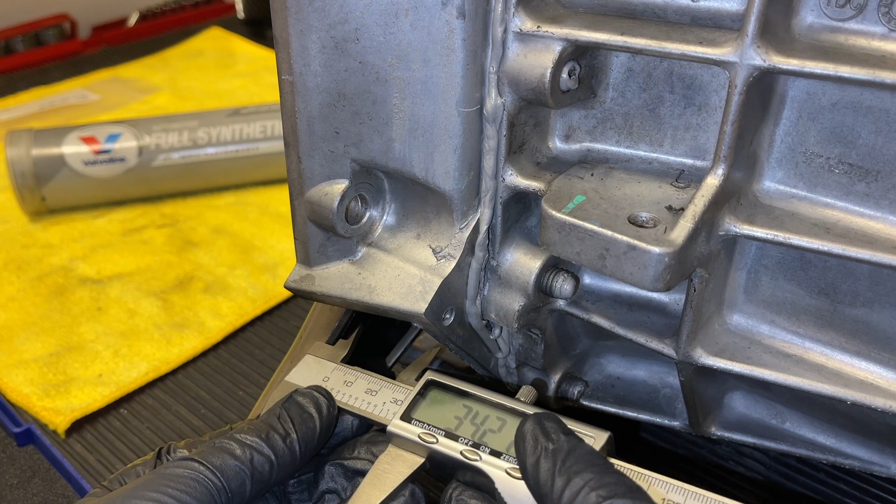Now we don't have to have it swing all the way to the front because our clutch is deeper, and so we're going to be contacting the clutch first. But you do want to take measurements, as I'll show you what we did a little bit later, and make sure that you're going to be within range where you're going to get a full travel on that clutch fork. And so starting from the factory, we had about 34.20 was the distance we had from the clutch fork to the case when the clutch cable was disconnected and we were touching the stock throwout bearing to the diaphragm fingers.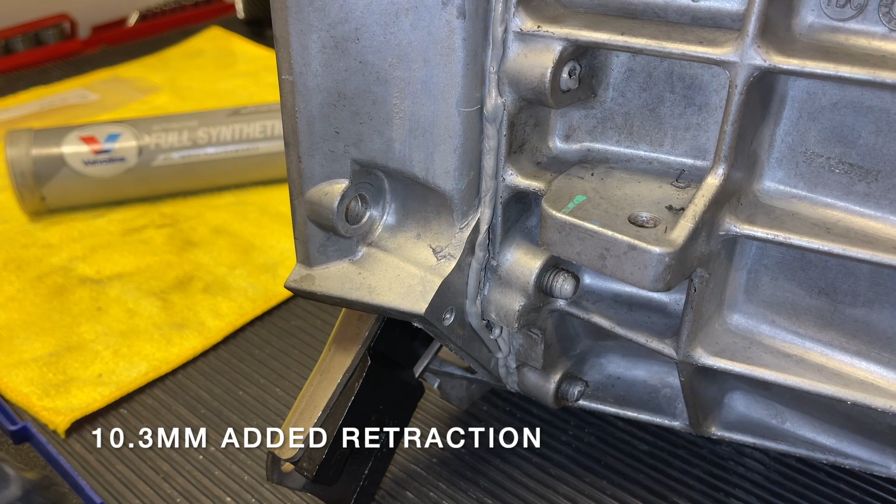So now, as you see, we kind of retracted this in more with that shorter pivot ball stud. And so if we compare our two numbers now, we have 23.87 millimeters, and so that's the difference of about 10.3 millimeters of added retraction. On the Magnum cases, I've even heard of them having to go shorter and adjust the case, but we are looking at the way that this swings, again, kind of like a door.

And so, our full travel, as we measure, might get us closer to the end of the retainer sleeve, and that's where this is going to start to bind up. So you want to have the pivot ball as far out as it goes so you have a good swing, but you want it as far in as it can go so that when the diaphragm fingers of the clutch are in here, we're not already hitting the throwout bearing when we're trying to install the transmission.

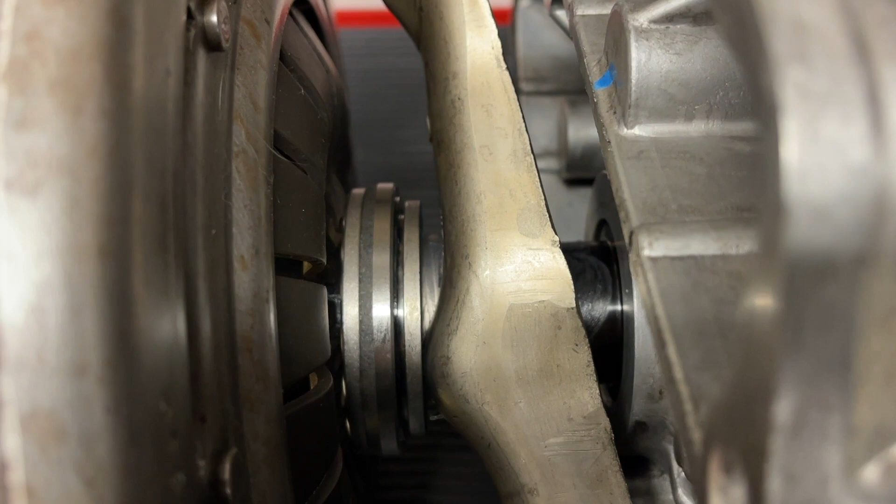So to show you physically as an example, our diaphragm fingers to bell housing was about 48.25 millimeters. So if we take 48.25 millimeters and we go from the case outward, that's where the clutch is going to basically be. And so we need to make sure that our throwout bearing can be retracted far enough that it's not hitting those clutch fingers as we're installing the transmission.

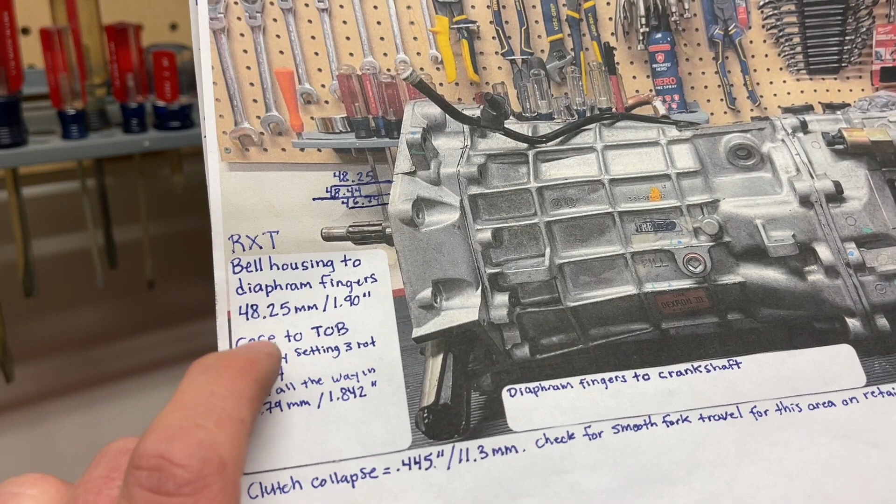So for this measurement, we went straight up from the throwout bearing in the fully retracted position and measured the case to the throwout bearing. And we came out at about 46.79 millimeters. So where we were 48 millimeters from the case to the diaphragm fingers, then that means we have plenty of room and we're not going to be contacting our throwout bearing and diaphragm fingers before the transmission's installed.

So we can now see we have about 3 millimeters of clearance between where the diaphragm fingers will be and where the clutch fork will be in its fully retracted position. So what this is going to look like on the car as an example, you can see when it's installed, we have just enough movement. And so if we wanted to, we could move the pivot ball in or out to adjust this if we're too close or too far away.

Remember, the diaphragm fingers will start to spread out as the clutch wears, so you don't want to have it completely tight. You want to have a little bit of a gap there for it to grow into as well. You don't want to have it so you can't adjust the throwout bearing and it's stuck against the diaphragm finger. So just make sure you're getting accurate measurements from the face of the throwout bearing up to the case, and then from the case to the diaphragm fingers, which would be the bell housing to diaphragm fingers, and just make sure that you're going to have that gap.

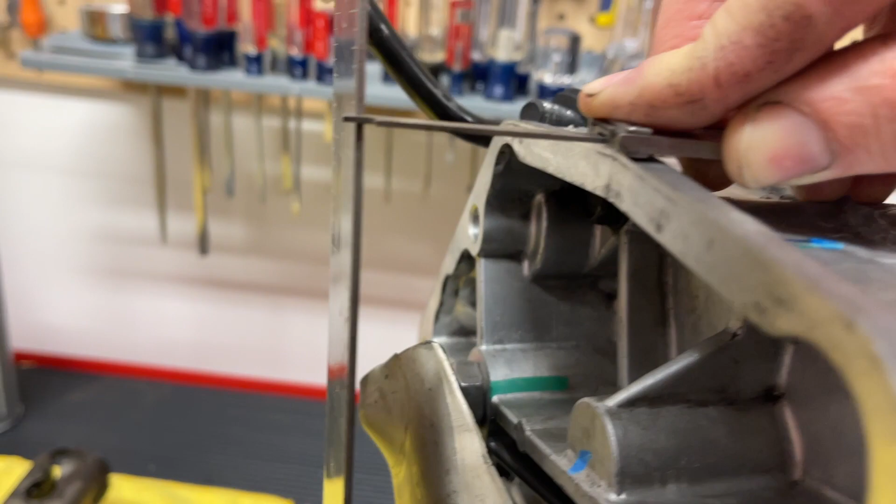So you can see we got our 3 millimeter gap here. That's going to be perfect. As you saw when it was installed, we had just a little bit of movement forward and back on the diaphragm fingers to the throwout bearing, which is what we want.

McLeod says it takes 445 thousandths, or basically half of an inch, to disengage the clutch. So basically what we want to do is look at that measurement and make sure that our clutch travel is going to be enough. Now, starting farther back on the retainer sleeve, it shouldn't be a problem. If we were starting forward, we'd be afraid that the throwout bearing would come off of the retainer sleeve. So for us, it's about binding, when it's going to bind up, and deciding if you want to bring that pivot ball stud out or in more.

Here's the factory swing. As you can see, it brings it all the way to the end. And so with the new pivot ball in place, you can see how it basically just stops that swing a little bit shorter. So we shouldn't need it to go all the way to the end, or we'll be overextending the diaphragm fingers on the clutch. So it's okay for it to start a little bit farther back, and it's okay if it starts to bind right at the very end.

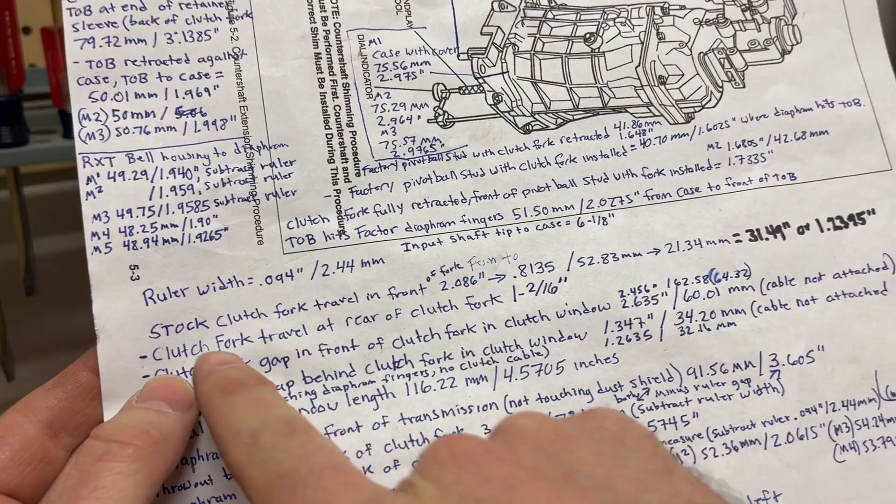So from our measurements, and this was the travel that was indicated down at the clutch fork, it was 1.2395 inches of travel is what it took for the clutch to fully disengage on the stock system. So basically we're going to look at that amount and we're going to compare it to how much travel the clutch fork is going to make at the bottom of the clutch fork and how far that goes in, make sure it translates to our 1/2 of an inch or our 445 thousandths.

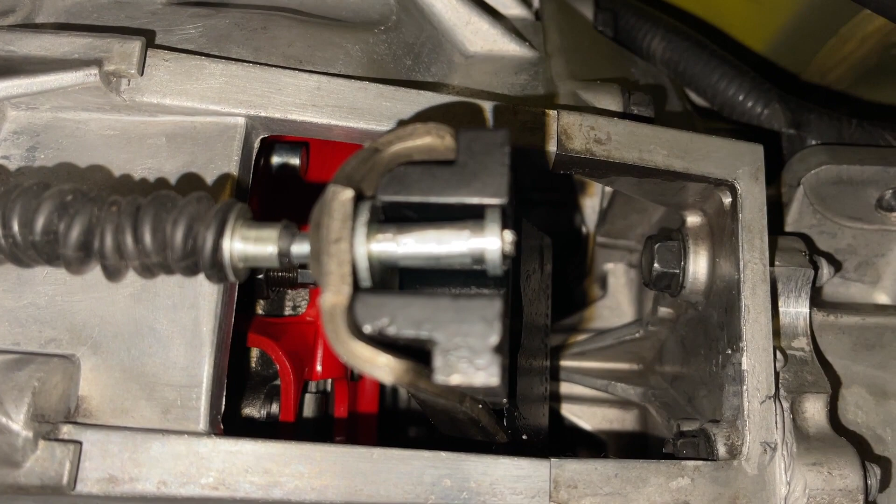So basically, as we take the measurements down here, we came in right where we needed to be. We have full clutch disengagement, as you can see by the springs and everything that's working there. Another clutch diagram shows that the clutch fork should also be perfectly straight from the pivot ball straight down when it's in the retracted position.

Now, since we're also changing geometry of how it swings and everything like that, it might not be perfect. So we are using aftermarket components and trying to get it to swing on a range it wasn't really designed for. So when you're happy with where it's at, make sure you do remember to go back and put your Loctite on and put your pivot ball stud in, and then tighten down that jam nut. We tightened it down nice and firm as well.

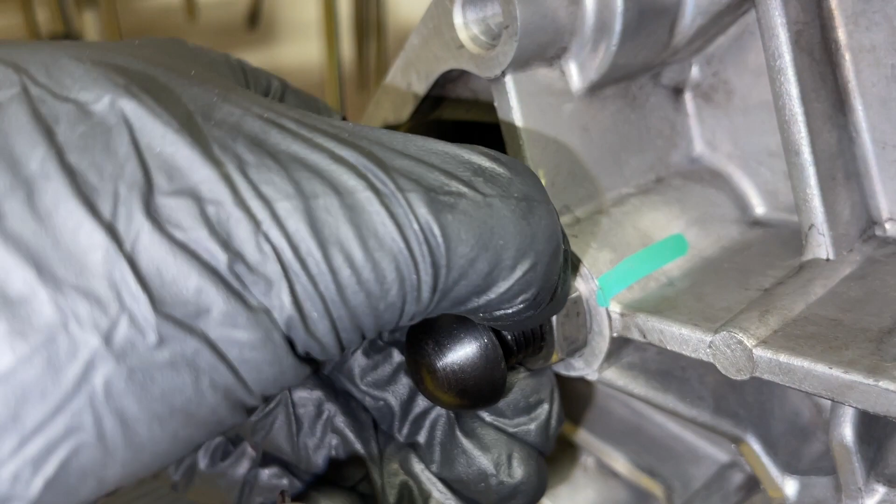And so just remember, with the T56 Magnum, you might have some differences in the case. It might not go in as deep. You might have to cut some threads. On the stock T56, this one worked out perfect. Okay, so everything's looking good. So we're ready to put this transmission back in. So I went ahead as well to make sure that the gears were all going to shift how they should.

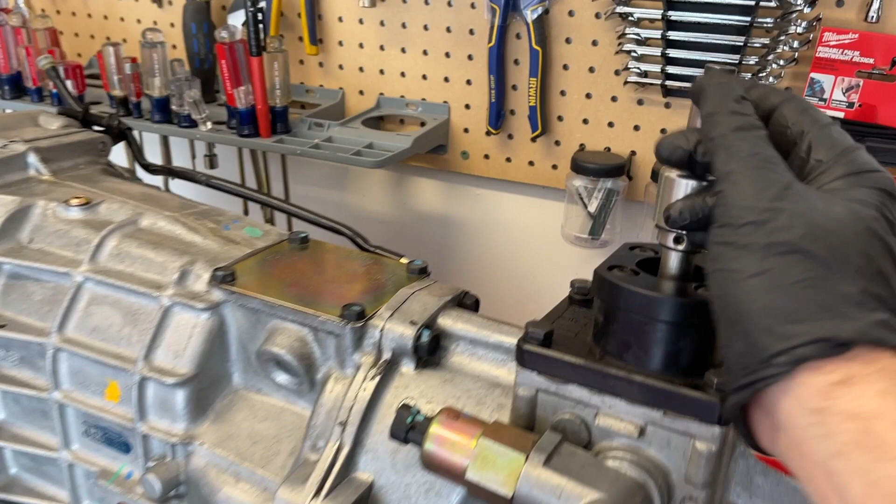So we brought the transmission to the car off of the jack just because to get under it, it's a little bit too tall on the transmission jack. Now as you're coming up, you almost need to angle the input shaft upward to have it point up and then straighten the transmission and go in. You can see I also did put just a small amount of grease on the very nose of the input shaft, where the pilot bearing will ride on the nose, and also just so it'll kind of push it into the splines lightly. You don't want to sling grease on your clutch discs or anything. But anyway, we got this installed.

Now, something else that I was just kind of playing with a little bit is this free play elimination mod. And so basically this is something I bought years ago, and it helps push the clutch fork away so you don't have slop in the pedal. Now the question is, should the throwout bearing be constantly spinning or not? And the answer is yes. However, you don't want it spinning and having too much pressure or preload on it to where you start to disengage the clutch, or you start to burn up the throwout bearing, because it's not designed to constantly spin with a lot of pressure on it. It's supposed to barely be spinning.

Now I've run both ways. I've tried it with the throwout bearing not spinning at all, using this kit to keep it from touching, and then it only spins when it's engaged, but that does give the bearing a shock before it starts. And you want to make sure that you have enough clutch travel, because if you're starting farther back and you don't have full clutch travel, then it won't disengage, and you can get locked out between gears, and you can hurt the synchros if you're not fully disengaged as you're shifting gears.

So this is just something we're kind of setting up as we're setting the throwout bearing distance. We're going to make sure, if you hear that, it's just got the tiniest little click before it starts to engage, and so we can adjust that out with the firewall adjuster.